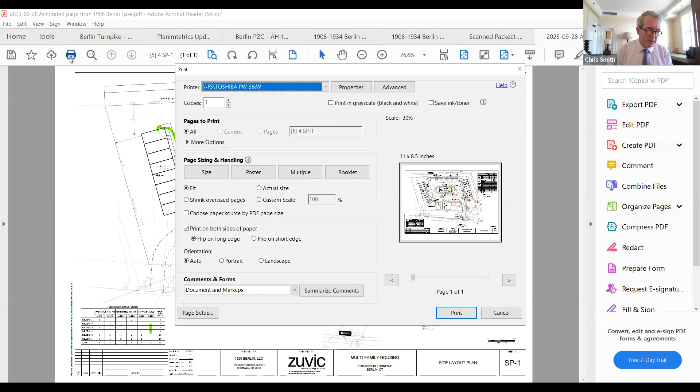I think Chris had some other questions he wanted me to address as well. For the record, Chris Smith. Mr. Ville, in your opinion, is the separation distance between the parking area and the buildings adequate and does not create a safety issue?

That's correct. And relative to the lighting, is it your opinion that the lighting as designed is adequate and sufficient for the proposed residential community? Yes, it is.

And with your driveway design and internal parking and driveway design for this site, in your opinion, is it safe and adequate for pedestrian and vehicular traffic associated with the residential development?

Yes, it is. And is it your opinion that the slopes and the retaining wall, in particular, can be constructed as designed in your plans? Yes, it can.

As to the compaction and other issues that Mr. Hanfield indicated, that there could be conditions relative to a qualified professional engineer or geotechnical engineer being retained to review the final plans, is that something you think is typical and not a problem?

I would take no exception to Mr. Hanfield's suggestions regarding compaction and geotechnical requirements based on his letter dated October 4th.

And again, the preliminary comments received from the state DOT STC relative to the request for their preliminary comments concerning what will hopefully at some point be an application for an encroachment permit. Is it your opinion that those items listed in the DOT STC response are minor and can be addressed readily when the application for the encroachment permit is submitted to the state, post receiving any and all required municipal approvals?

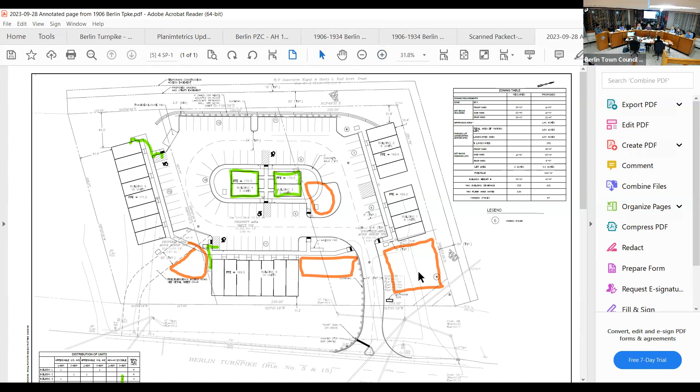So you can see the four areas in red that we've highlighted there. The central one, next to the building in the front, to the right - that one's actually in a depression. The one at the north side of the property is relatively flat, not a steep slope. And the ones internal to the site, on the island and adjacent to the emergency access way - not over the emergency access route - those are relatively flat as well.

When I look at the plan, it's hard for me to envision when you're looking at a flat piece of paper. But that westernmost stretch of parking, it's going to be hard to maneuver all the snow from that back section all the way to the front of the property.

So is that what the plan is, to maneuver all of that, push it around to the front on both sides? Or is there going to be removal? Is there a plan to be removing it?

What's the plan? Typically in sites like this, we'd use loaders, not just plows. So there is some picking it up and moving it type of action that takes place. It's not just plowing. So what are the circumstances that would require it—how much snow would have to fall to require that the snow be removed from the site versus deposited on the site?

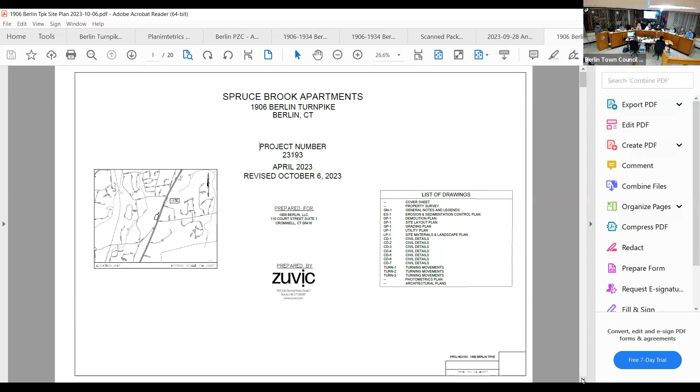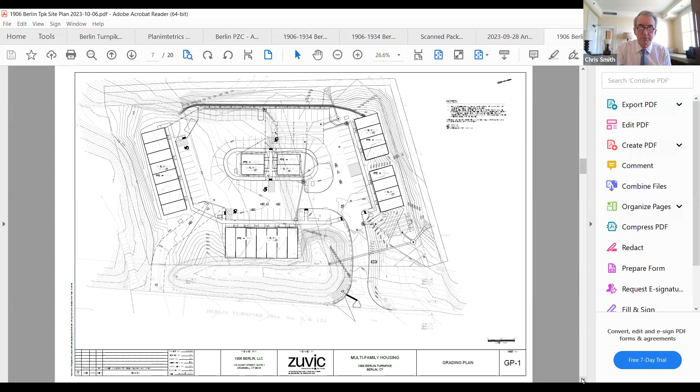If I may—Chris Smith, for the record, just wanted to indicate that the maintenance plan that would be prepared relative to slopes and the retaining wall would likely be generated with the consultant Mr. Hanfield indicated could be retained, as a condition of approval, for the purpose of overseeing that when the construction of the retaining wall occurs, or when the permit—that would have to be prepared before the building permit is secured. So I just wanted to clarify that. Thank you.

Mr. Dyken, did you have a follow-up question? I'm sure you can't come up with an answer with scientific precision for Commissioner Dorsey, but could the property handle, let's say, a foot of snow overnight? Is there enough space to pile up snow of that magnitude? In my opinion, yes.

For the record, I brought up the grading plan. Other questions?

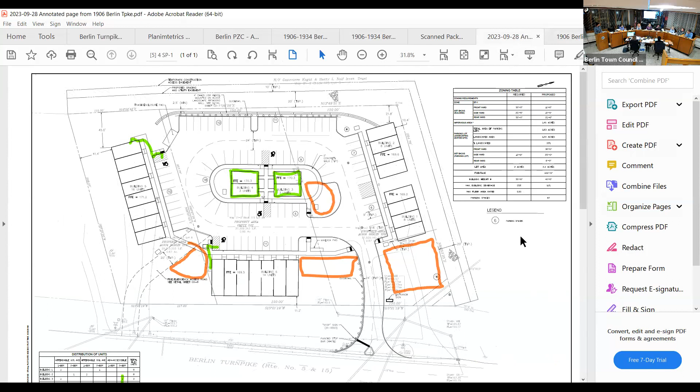Just more of a comment—looking at the snow storage spot that's in the depression to the northeast, I see you have mailboxes in the way, as well as plantings, and then a guardrail as well. It doesn't really seem accessible to snow removal equipment.

And then the other comment I'd like to make—we touched on it last meeting—I'm not seeing any additional dumpster space, just guessing based off the square footage there. That's very insufficient for 52 units. It almost seems like it would be appropriate for each building block to have their own dumpster, especially considering that people all the way to the north are going to have to carry their garbage across the entire site to dump it.

I can see this becoming very messy very quick. The other thing I noticed is that there are no garages here, are there? Correct. All right, so everybody's parking outside—all those parking spaces around that circle, everything is basically pavement. So if you're going to get a foot of snow, where are the cars going to go so you can plow? Or are you going to plow them in, and then they have to shovel themselves out and back out, and then the plow has to go? I'm not sure how that works.

For the record, Attorney Megan Hope with Alter and Pearson.

Just a quick comment regarding snow storage. What's typical in complexes like this is there's a snow plan in your lease agreement. You provide your cell phone number to the operator of the complex, and after a snowstorm they send out a mass text saying the day after the snow stops, at a certain time you need to move your cars because they're coming in to plow. Typically, and this has been my personal experience living in an apartment, everybody leaves, they clear the site with plows and other loader equipment.

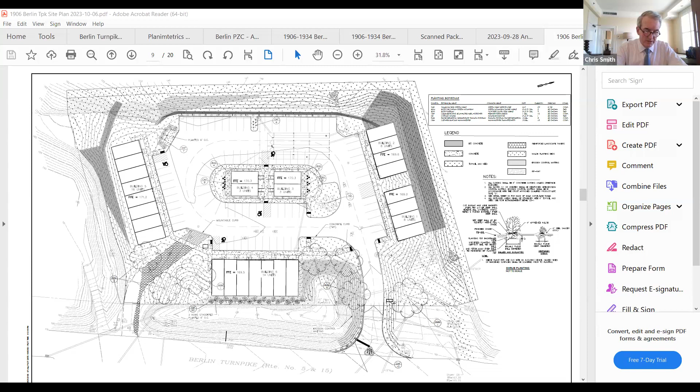There's a reference to basement windows, complete code, as the drawings are only conceptual. As we indicated with the correspondence from the assistant building inspector, looks like most of these items will be addressed, just scrolling through them, with the final detailed construction plans that will be submitted to the town in support of obtaining a building permit. That would be reviewed, I presume, as they usually are, by the building, not only your building inspector, but by your fire marshal, to ensure that the final construction plans addressing these concerns that he makes reference to here are addressed. But that would be my response at this point.

And he does note that there's no code requirement for the minimum distance to a slope. But he would certainly - most of the items I'm looking through here appear to be items, as with the building inspector, that would be addressed with the final detailed drawings for the buildings themselves when they're submitted post zoning approval.

This is the letter I was speaking of from Steve. If you're asking me to comment on what's highlighted, then the final plans would be adjusted or would address that. I can't see everything because of the block out on the right-hand side there, with who's on the Zoom.

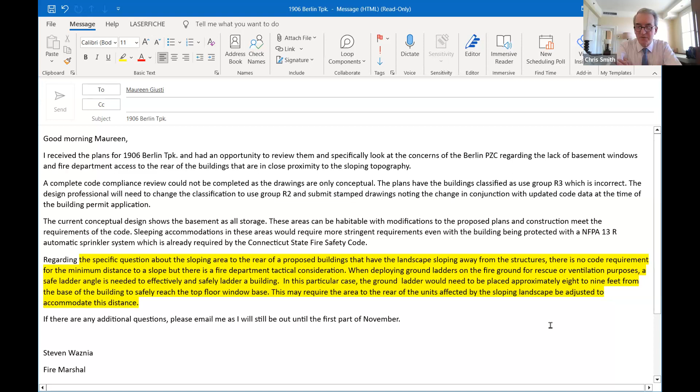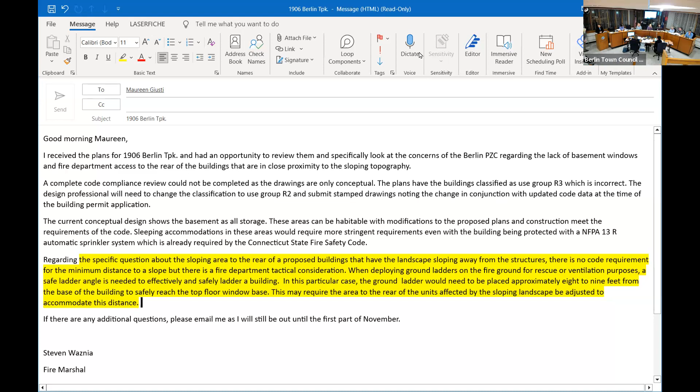Enjoy your flight home. All right, Dan, maybe you could talk to the commission about how you could design the site plan differently to address that comment from a minute ago, by either grading it differently or using a retaining wall or any other method.

Dan, for the record, you're correct. If we were to expand the level shelf behind the building, then the slopes would either get steeper, or a larger easement would be required to expand the limits of the slope, to run the slope out equally far. So if we're extending the shelf 4 or 5 feet, the slope runs out 4 or 5 feet to maintain the 3 to 1 slope.

Steeper slopes are plantable and can be maintained, steeper than 3 to 1. We can go to 2 to 1 and install erosion control matting. If the slope gets steep in a way that's not maintainable, then you could conceivably put a retaining wall there.

How high would that retaining wall be? We're already at 18 feet, is that right? The retaining wall, I think we're talking about the north side now, because if we're talking about access to the buildings, I think we're talking about the slope on the north side of the plan, at the rear of Buildings 1 and 2. So there's no retaining wall there at present.

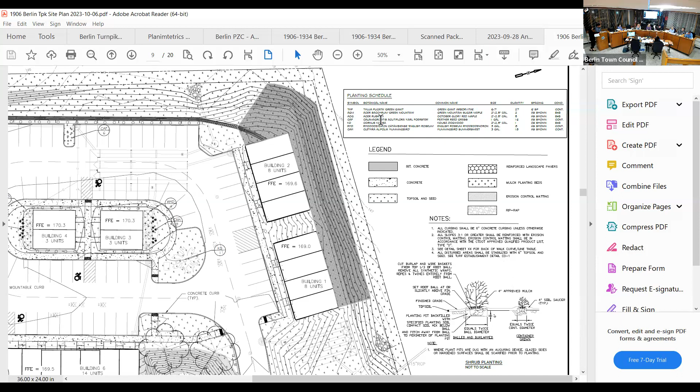Do those detention measures intercept what's coming off the turnpike? Are they connected to it? No, the runoff from the turnpike is not impacted by our project, so we do not capture it. There's a DOT pipe under the proposed driveway that would remain and continue to carry that stormwater.

I'm not suggesting you'd have anything to do with the water coming from the turnpike, except that the water coming from the turnpike has the potential to impact that northern tributary area. Is that correct? Yeah, the outlet for the DOT drainage is much lower than our project. So it's a few feet lower than the existing property, and it'll be quite a few feet lower than our project when the fill is imported.

Can I ask a question? Let me ask a question.

The area in the front along the turnpike, I guess you'd call it the swale, because there's a 10-foot difference there from your entrance way down into where you're proposing to store snow or your excess stuff there.

How far is that from the turnpike, right up against it, correct? That's basically it. Well, the swale is located all in the DOT right of way, and I'm not proposing any grading change to the sides of the swale.

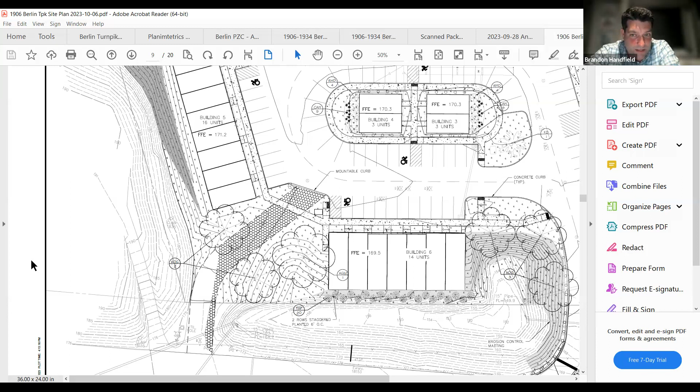Does Mr. Ville want to address that question, or? No, this is a new request by the commission that we have not had time to prepare for. I'm sorry, we've had four meetings so far, and this is the first time I'm hearing about the shelf that we've prescribed being inadequate. So I can't respond to that one at this time. Okay, so that's a question mark. All righty.

I guess my question is, why would this shelf be any different when it comes to considering our comments?

What? I'm sorry, I didn't hear you, Mr. Ville. He was talking to me. Again, for the record, Megan Hope, with Alter and Pearson.

So, obviously, if we had gotten that comment earlier, we could have come better prepared with some options. I think if it's going to be a requirement of this commission as a condition of approval that we need to have an 8 to 9 foot shelf around all the buildings so that a ladder from the fire department could get there.

That's fine. We would need to show how we can accommodate it. And at this point, Dan can't answer that because we would need to look at options. And I think, could we approach the DOT with an encroachment permit where we could regrade a portion of that area? That's possible. Could we shorten the building by whatever amount of feet we need to have that area? That could be an option. It's speculative at this point.

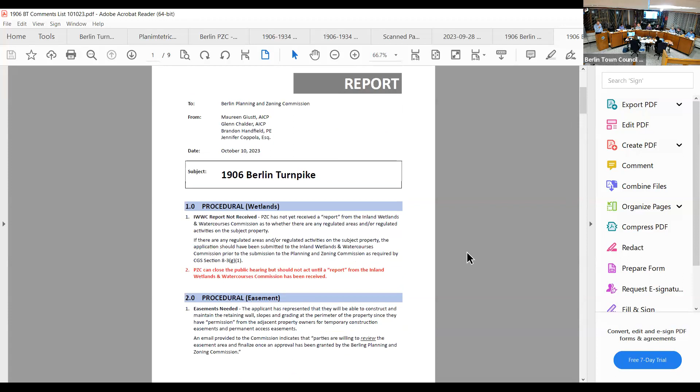The third element relates to the site plans themselves. I think Attorney Smith indicated earlier that they really had no objection to the comments included in Brandon's report. I think the concept of the quality of the fill being used, structural fill, is identified in this report - page 3, item 2A talks about controlled structural fill or compacted granular fill.

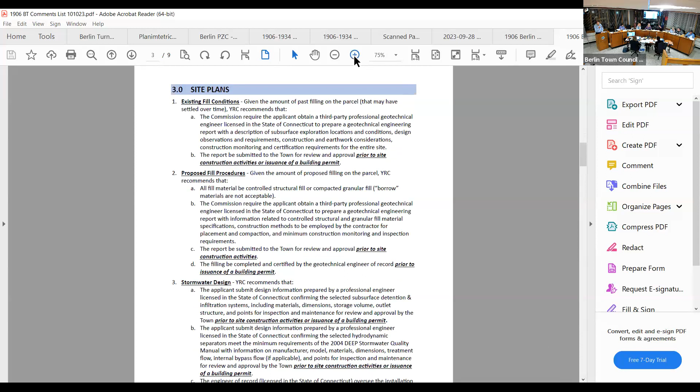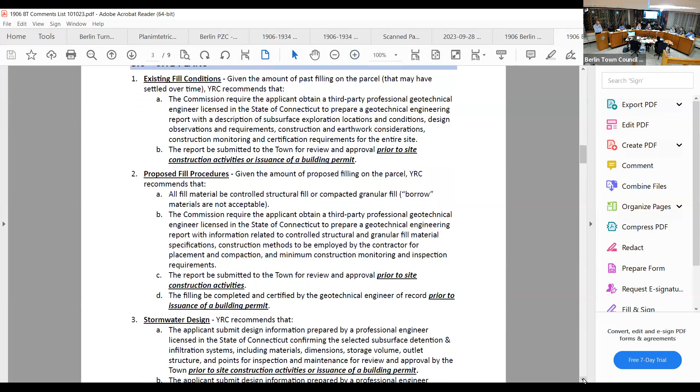I think with regard to the issue about snow removal, etc., the commission could apply a condition of approval related to keeping the travelway open for fire response, using a loader as necessary to clear the snow. As you know, there are times in large apartment complexes where snow gets ahead of their ability to keep up, and as long as we make sure public safety is protected, there might be a way forward there.

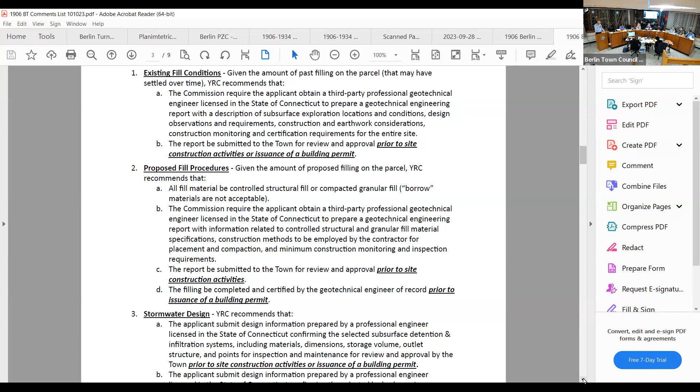Listening to the discussion tonight about the trash provisions, I noticed there's no enclosure around that trash area. So one of the things the commission may want to think about for a condition of approval is an enclosure with a gate, so if anything does spill over in terms of trash or whatever, it's going to stay in the enclosed area.

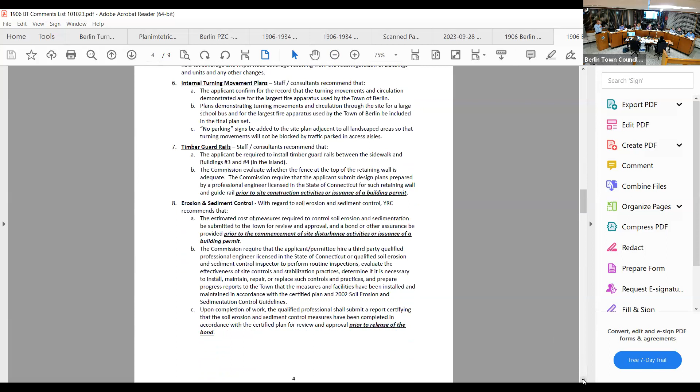Item number 4 is the architectural plans. I don't think this has been disclosed to the commission, but just to make it clear for you, 2 buildings in the middle, when the application came in, were 4-unit buildings.

Okay, can you bring the site plan up for a sec? Well, I wish I had a green. No, I was just kidding, actually.

So the 2 buildings in the middle, there, right where the mouse is going, when the application came in were 4-unit buildings. They were similar to the other buildings in the complex with 1-bedroom units on the ground level and 2-bedroom units on the second and third. You may recall we commented that we need handicapped units here, and so as a result those buildings have changed to 3-unit buildings, a handicapped unit, double width on the first floor, and then 2-bedroom units on the second and third floor.

The unit count has stayed at 52 units because building 5, you can scroll over to the, yeah, keep going, there you go. A little more if you could.

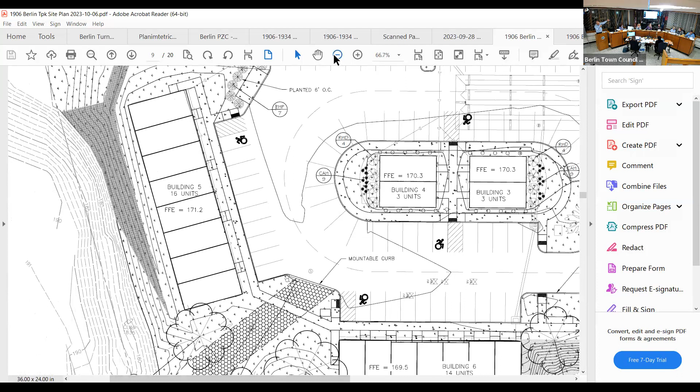A unit has been added to the west end of that building behind, or near the trash enclosure. That's a new module. That building, when the application came in, was 7 modules, meaning it had 14 units. Now there's 8 modules and 16 units.

And as a result of that, I find it hard to believe that there's been a reduction in impervious coverage, but we can check that as part of the commission's deliberations. But the more important thing I wanted to bring to your attention is the unit mix has changed. So there needs to be a reevaluation of units, how many units we need to meet the affordability set aside percentage in terms of how many 2-bedrooms and how many 1-bedrooms. I think that's something we're going to have to take a look at as part of the deliberations.

I do think there's an issue with regard to the basements. Again, the building official has identified that the space doesn't meet the building code definition of habitable space. Habitable is a special word in the building code; it means that it's used for living, sleeping, cooking, and other things, but it's potentially usable space. And so it's just difficult to wrap my head around in terms of what this means for the complex.

If the commission is concerned about the potential use of the basement, your options are to require a slab on grade for those buildings, or reduce the clear height in the basement to, I think it's 6'4" in the building code, then it can't be used for habitable space at all. It's still there, but you can't use it. So particularly for the affordable units, we created a 1-bedroom affordable unit with a full basement. Does that actually create challenges in terms of the affordability of the unit? It's not clear how that gets managed, but I think all of this stems from the fact that...

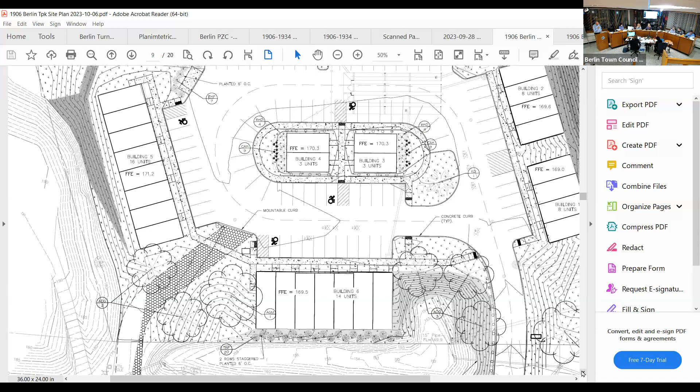On page 7 of the report is section 5, dealing with traffic and transportation. The applicants have started their dialogue with DOT in terms of their encroachment and curb cut permit. I think as long as town staff is kept in the loop on this, in terms of those requirements, making sure that the concerns expressed here about traffic volumes, U-turns at Spruce Brook, and all the other stuff are considered. It's a state roadway.

Section 6 deals with the zoning regulation that was submitted. You may recall as part of the testimony, Attorney Smith indicated that the submission of a regulation was required by the statute, but the commission didn't have to approve a regulation. So the commission, as part of deliberations, will have to decide how it would like to approach this. I think there's a couple of different options that have been shared with the commission for your consideration.

Section 7 of the report deals with the affordability plan. Again, because of the change in the unit mix, this ripples throughout the affordability plan in a lot of different ways in terms of the number and type of units that need to be deed restricted. No finish schedules have been provided at this time to demonstrate the units are identical. We've had conversations about the affordability term, acceptance of the administrator, income eligibility, and some other provisions in the affordability plan. But I also think it's possible that these could be addressed, depending on the commission's considerations, through conditions of approval. So that's all I have for you. Our hope was that this document would simplify things for the commission moving forward.

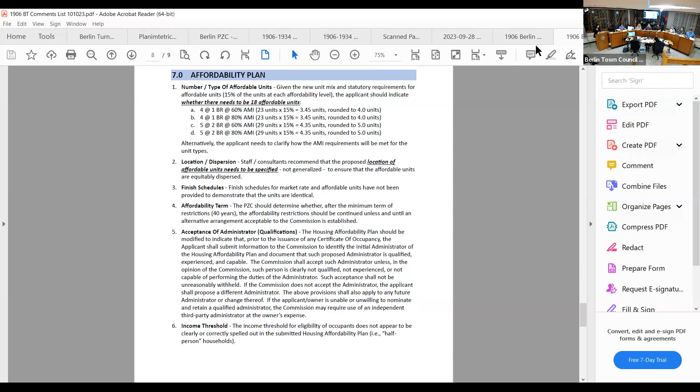I do want to point out for the record that there are a number of items in the report that have already been addressed in this final plan set. One in particular is the designation of those specific units. If you turn to sheet SP1 of the plan set, you're going to see a chart on the right side of your plans.

That chart, at the top, is called distribution of units. You're going to see the units broken down by building, with columns for 1 bedroom and 2 bedroom at 60% AMI and 80% AMI, showing that even distribution. Just below the zoning table, I wanted to point out that we have designated those specific units.

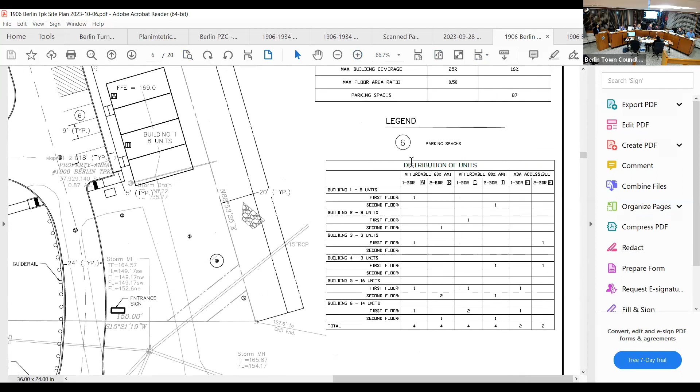Okay, I'm sorry, because we just found the page that we were supposed to be looking at. Can I ask you to repeat which designated units they are?

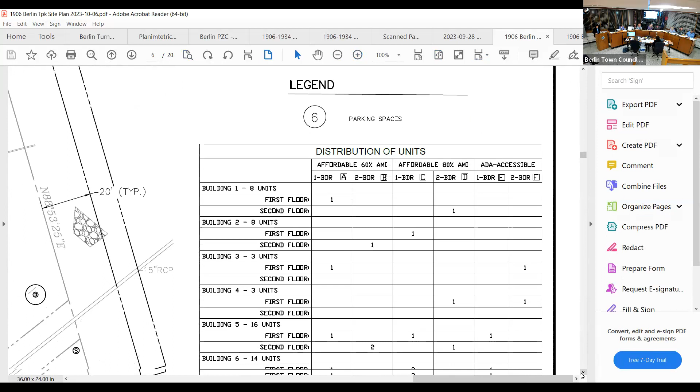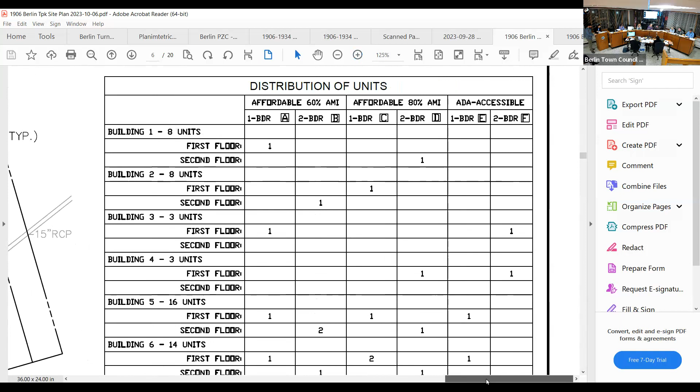Sure. So if you look at the distribution of units chart, it says distribution of units, and below it you're seeing the different columns. Then you see where it says 1 bedroom with a letter A, 2 bedroom B, B, C, D, E, F. Then if you look at the buildings, you're going to see those same letters over a specific unit, and that's how you can tell where the specific unit is within each building.

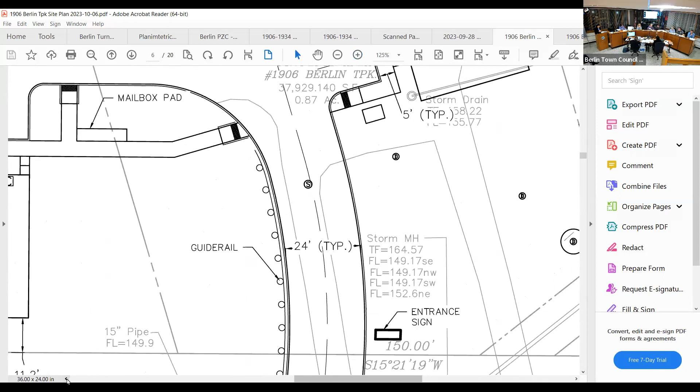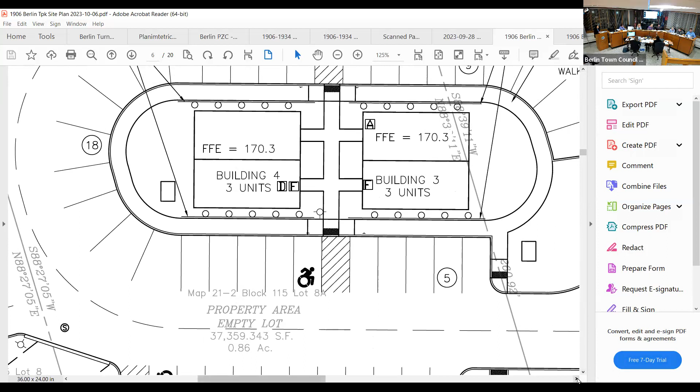For example, if you look at building 2, you're going to see a letter C and a letter B over the units. That would be a 2 bedroom at 60% AMI and a 1 bedroom at 80% AMI, for example. We've shown the chart on the right to show that even distribution, and then used those letters to show which particular unit is located within the building.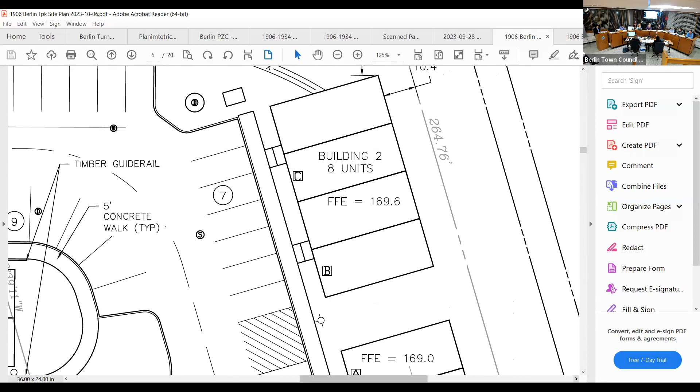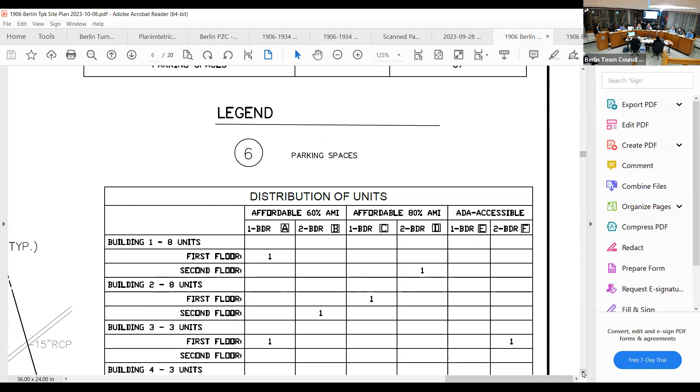Before I turn it over to Brian, what Chris told me is that we will not consent to go beyond that 40-year requirement, which is within the statute. We will not go beyond the 40-year requirement. He told me he already said that, but if he didn't, I'm saying it now on the record. We will stick to that provision, and also the applicant and the client will be the administrator of the affordability plan as well. That was something he told me he had already indicated, but I'm happy to repeat it for the record.

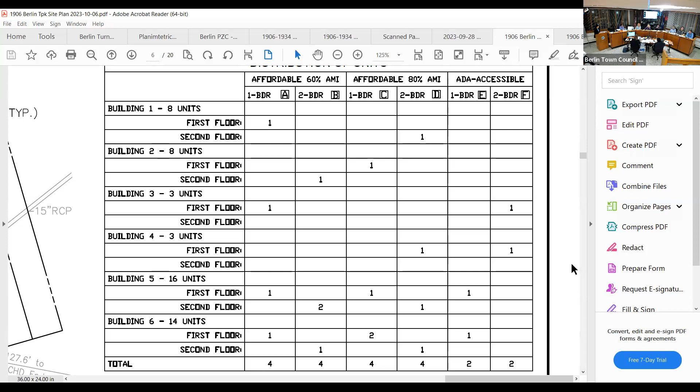I think with that, Brian, do you think you could go through section 7 of the staff report and touch on the items that you feel still need to be addressed? Sure. For the record, Brian Miller, the Miller Planning Group of Wallingford, Connecticut.

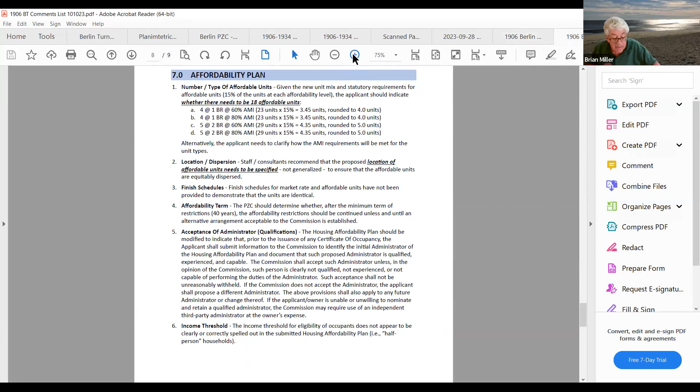I took a look at that. We received it late Tuesday evening, and yesterday I was otherwise occupied, but I did go through it. To go down the list in the affordability plan, as Glenn acknowledged, we submitted an affordability plan dated August 2nd, which I think addressed a lot of the issues he raised. But on these particular issues, number one, the change in the type of affordable units, we'd be happy to make that change. That's not a problem.

Sometimes the site plan got ahead of the affordability plan. The location was just addressed. As for the finish schedules, I'm not sure if the developer has furnished that, but I do want to point out that the plan did say that it would be identical.

The affordable units would be identical to the market rate units. The original proposal to have the floating affordable units sort of ensured that, since the affordable units weren't established at the point of construction. So all units would have been constructed equally. I mean, I don't know what the schedules mean exactly. I'll leave that to the contractors.

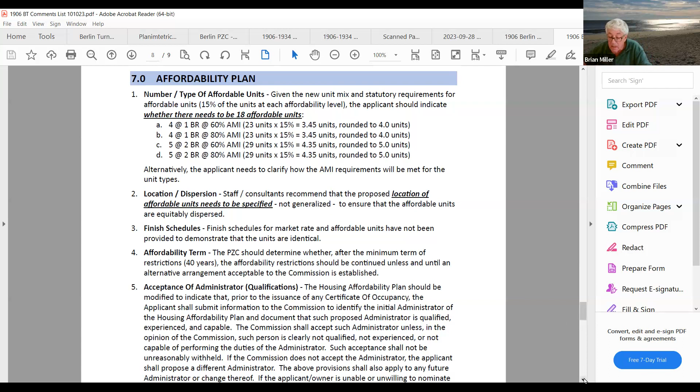The issue of evading these regulations was discussed, and I think the state, we're going along with this 8-30g. It's a state regulation, and we've been interpreting it as it's been over the past 30 some odd years. But the way it's put together is that it expresses: if it meets these qualifications, including the 40-year term, it qualifies as an 8-30g. It doesn't say that it would need to meet any additional qualifications or requirements.

I think that speaks to the 40-year affordability term, but I think it also talks to this acceptance of administration. We've not changed that. And again, I would ask, I believe this isn't the first 8-30g that's been before this commission, and these are very general requirements. Why they pop up all of a sudden, I guess, would be one question.

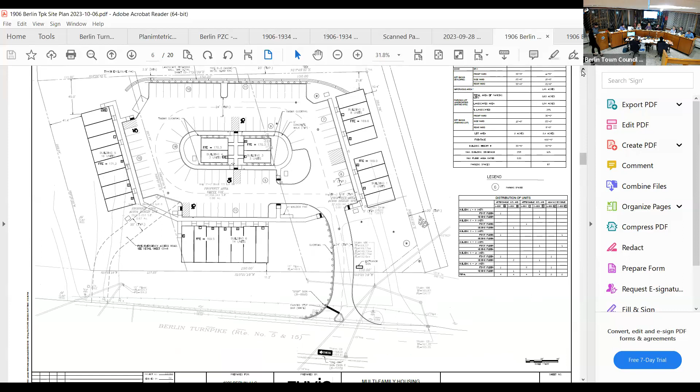So the building at the west end of the site, in a previous revision, was the same footprint as the building on the south side of the site. The building has gotten longer and has more units, but it shrunk in its depth. Building 5 used to look like building 6, which is at the bottom of the screen - you can see it was much deeper. So it's gotten shorter and wider, and the total reduction in the footprint of that building is 470 square feet, accounting for the extension of the sidewalk, giving a total reduction of approximately 220 square feet of impervious area. So while we went larger in one dimension, we went smaller in the other.

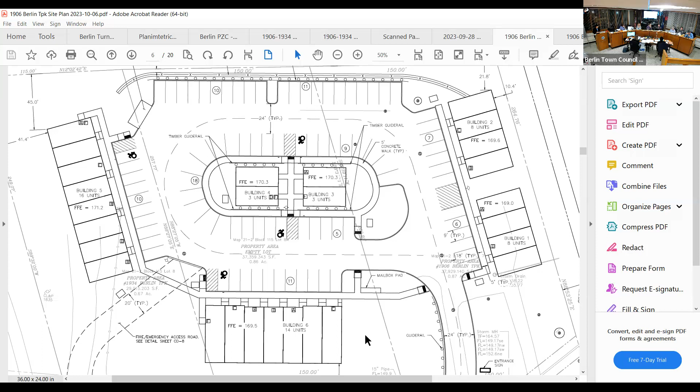Regarding item 6, which had to do with internal turning movements, we did submit as part of this revised plan set that these internal turn movements worked. I would direct you to sheet Turn 2 and Turn 3, showing that the town's largest fire truck can fit through the site. Sheet Turn 1 is the plan that demonstrates that the school bus can fit through the site. So those are things included in this plan set.

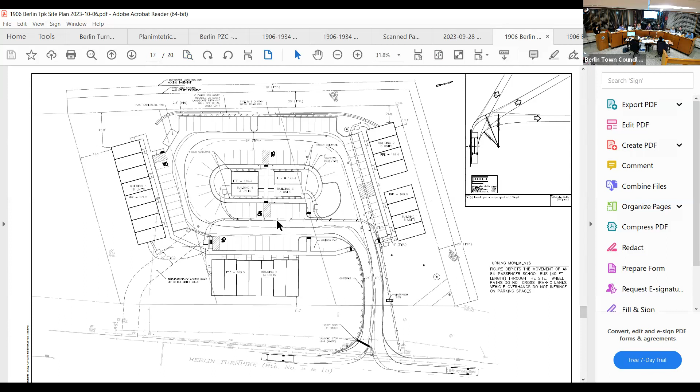We don't have an issue with 6C about the no parking signs, so that's fine as a condition of approval. Regarding the timber guardrails, that is item 7 - those were added to the plan. You can see those on the west and east sides of the central buildings on sheet SP1.

Dan, regarding the fence on the retaining wall, can you state for the record how tall that is? I'd have to refer to the civil - 4 feet, it's shown as 4. So we are showing a 4-foot fence on top of that retaining wall, on the west side.

That's item 7B, car protection. So in front of the wall, we have a metal guide rail, and on top of it we have a fence. The fence, you can see it on SP1, it has a note. It doesn't have - I was looking for the detail you're referring to. I thought he just said the sheet number and I was trying to find it.

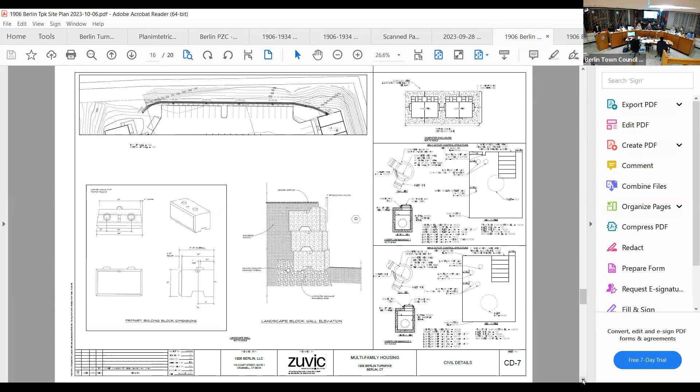I think everything in items 8, 9, and 10 were all things from Brandon's memo that we already agreed could be conditions of approval. So now we're at the architectural portion of Glenn's report.

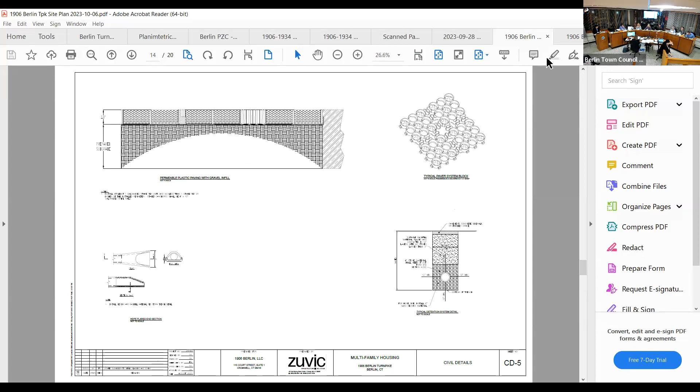I did want to reiterate for the record that yes, there has been a change in the unit mix since the beginning. I believe when Attorney Smith originally filed, it was 26 one-bedrooms, 26 two-bedrooms. We now are at 23 one-bedrooms, 29 two-bedrooms. The total number of units, 52, has remained the same, and the total number of parking spaces, which is 87, has remained the same as well.

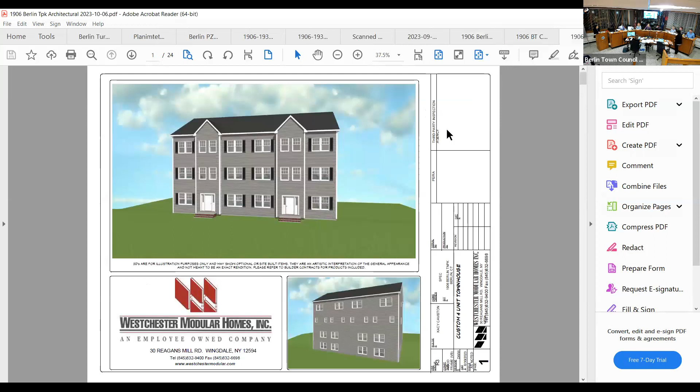Regarding the basement configuration, we would agree to a condition of approval that they not be used for sleeping purposes. We did see the comments that the building official made and don't disagree with his comments related to the code and how that space could be used. My understanding is that the concern is those could potentially be used for additional sleeping purposes, and we would be fine with a condition that says that use is not permitted in those basement areas.

May I interrupt quickly - does that mean you're agreeing to a maximum ceiling height of 6'8"? No, the client's indicating we wouldn't consent to changing the ceiling height in the basement. So how are you going to prevent somebody from sleeping down there or subletting that space? Sure, so we would have terms within the lease agreement, which is standard, that there can't be sleeping in the basement. But because there's no way to get people out of that basement, is there? There's no windows. There are windows in the basement.

In the rear elevations. All right, let me look at these elevations, okay?

All right, here's the rear elevation. So are these not the first floor? The first floor is, no, that's the basement, and the key part here is to look at that green, to the right and left of the building. So that would be all green, right? So there's nothing to prevent people from having that as a living space.

Really, why don't you come right down to it? You've now got windows out there in the basement. Well, we do think residents would be using it, but they wouldn't be sleeping down there. I mean, in my basement, I have like an art table for my kids and storage, and I think that's what we envision that use being, like typical basement uses, accessory uses, ancillary uses.

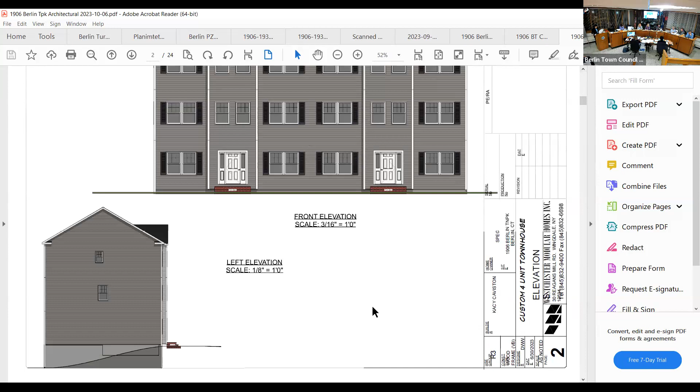Now this, sort of the front door on page 2, your front elevations as far as your front doors go. Do these buildings step out at all, or is it just an optical illusion that you create with the framing on the door? So they do, hold on a second. I think the best thing to look is at the floor plan. Ooh, that's right, it's right below it. Does step out a little bit, the face of the building.

All right, questions? Sorry, I didn't mean to hog that. We're going, I'm on page 3. Building, each building has like 1, 2, 3. Page 3, sorry.

Just for clarification, the windows on the bottom are your basement windows. Correct. So where's your rear egress going to be, those second floor windows? I'm confused by the question. So there's no back door in this building. Correct. If you ever had a fire, how are you getting out? You're going to jump out a window? There's no doors in the back of that building. Correct. So our buildings do meet the fire code.

Was there a report that our fire marshal passed that? I don't believe there's a review of the fire code from the fire marshal yet. That typically happens at the time of building permits. Post approval, we file complete detailed plans, reviewed by the building department for compliance with building code and the fire marshal for compliance with fire code. But they have been designed in accordance with both the state building and fire code.

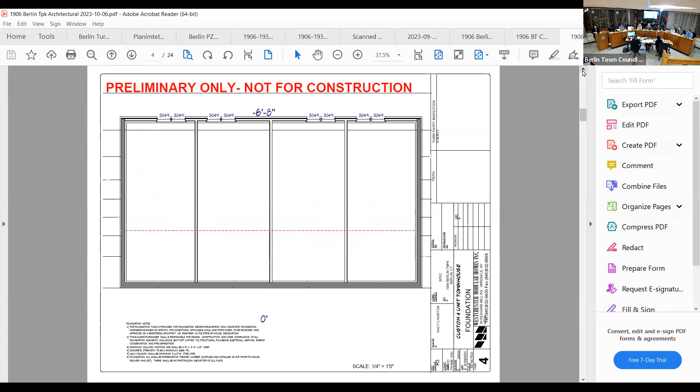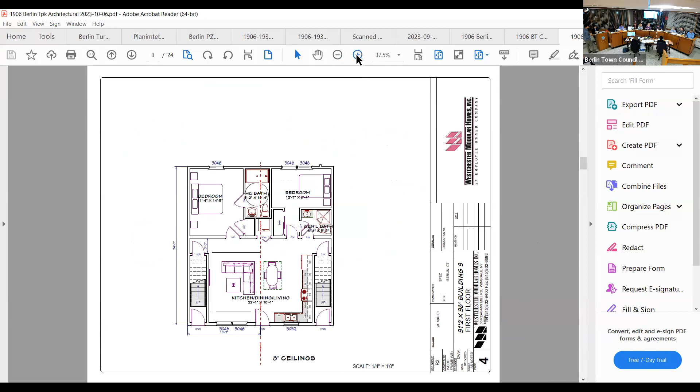This is supposed to be the basement, right? This is the foundation. Okay. Dan, is that one correct? Is that the one you're looking for? That's the 2-bedroom accessible, that's buildings 3 and 4. That's three. Page - with the plan that says page 4. No, building 3, page 4.

Oh, I'm sorry, on this, to the thing, can't seem to get rid of it. My page 4 does not look like that. I don't know, yeah, probably. Each building, if you look, on the right-hand side of your page it says what building number it is. First floor, building 3. Building 3, okay, building 3.

31'2" by 30 foot, building 3, first floor. So it says building 3, it should be the 8th page in the plan set. How does that help, 8th page in your... Well, if you count the pages, it's on the top of my screen, it says page 8 of 24. Page 4.

Ah yeah, okay, so what are we looking at now? We're supposed to be looking at the handicap units. Yeah, I'm just taking a review. What's that marriage wall that I see? What's that stand for? There's not a wall that cuts directly through the apartment, there's a perforated marriage wall. Oh, it's a modular building.

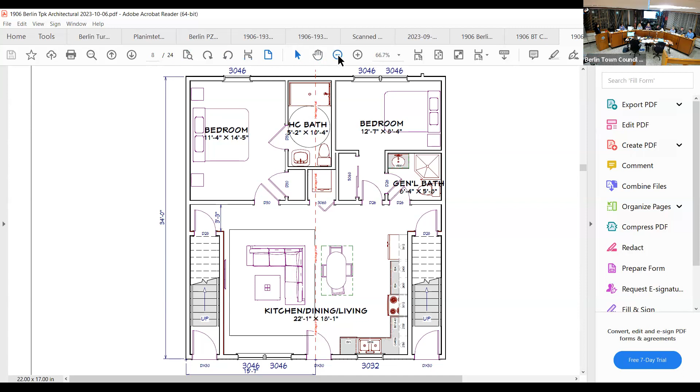Okay, because on the pictures, on some they say 9 foot ceilings, and then others say 8 foot ceilings. I don't know if that's an upstairs or downstairs or what.

Just to address the commission, I think Attorney Smith had mentioned this in the beginning. These are conceptual plans. Every building code, once we apply for building permits, this gives us the idea of the perimeter of approximately what's gonna happen inside.

Some of these questions are detailed questions that, I don't mean to be rude, but really kind of don't meet your purview here. Yes, I want the buildings to look good, but it's your opinion perhaps that there should be shutters in the back. It's my opinion that there shouldn't be. It's just two people having an opinion.

But what's a matter of code is that we will definitely meet those. These are preliminary conceptual plans that do not meet every building code. If the fire marshal says we need to add an additional type of sprinkler, we'll add it. If for some reason this can't work and we don't get a building permit, we couldn't proceed.

So I understand the details and what you're looking for, but some of the stuff is items that will come up later.

Well, I understand where you're coming from, Mr. Snow. However, you have to understand, with the commission we're in a public hearing right now, so we have the opportunity to take testimony from you folks. Once we close the public hearing, then I can't go to you, I can't discuss things.

Understood, so I am putting everything up front. This commission is doing everything it can at this late hour to put everything up front, because you're already telling us you're not going to extend beyond today, which tells me I've got to have a motion to close the public hearing.

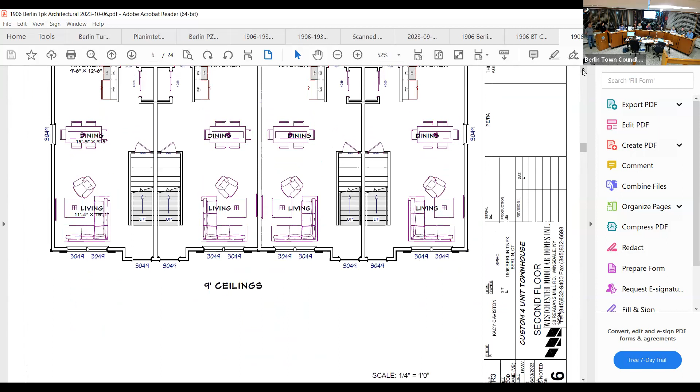Because we've got the backs of the buildings that are very tall from the neighbors, and if they're 9-foot ceilings on some buildings or 8-foot ceilings on other buildings, they're gonna see the differences, and it's hard for us to see that on a flat drawing. So now we're having these nice little picture drawings, and I'm not technical so I can't tell you what that is -- I'm trying to get a better visual of what they're gonna see on the back or in the community.

And it kind of leads into another question I have -- your plans have changed. I think the planner had mentioned that the buildings have gone to 8 instead of 7, and maybe the length is shorter or longer. I think what we were looking for before is this letter that had to do with the handicapped units.

I'm having trouble understanding how this plan fits into a narrower or longer building, because we have wheelchair accessible units in buildings 5, 6, 3 and 4. I know it's just a general picture, there aren't lengths, but does that accommodate them the same in all of those buildings if some ceilings are 9 feet and some are 8, and some buildings are longer or narrower? There's no elevator. We've got 9 feet for the first floor and 8 and 8 for the second and third.

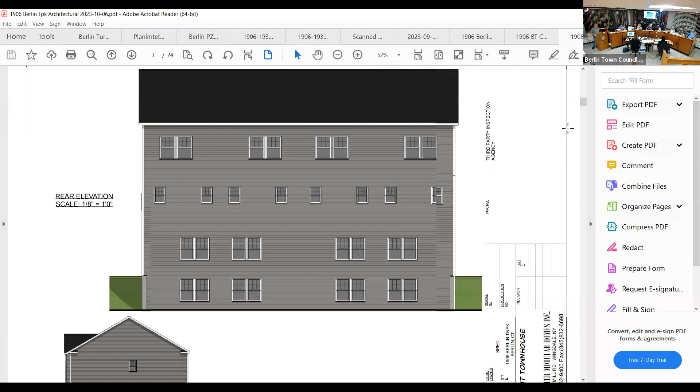Regarding the handicap accessible units, my understanding is that the ADA units are those units in building 3 and building 4, and that those aren't floating units. That floor plan is for the middle units, the ones in building 3 and building 4. So there's a different floor plan for the wheelchair units in 5 and 6. A good indication is if you look through the floor plans, when you see the bathroom you'll see the HC designation, so you'll know you're looking at that accessible unit.

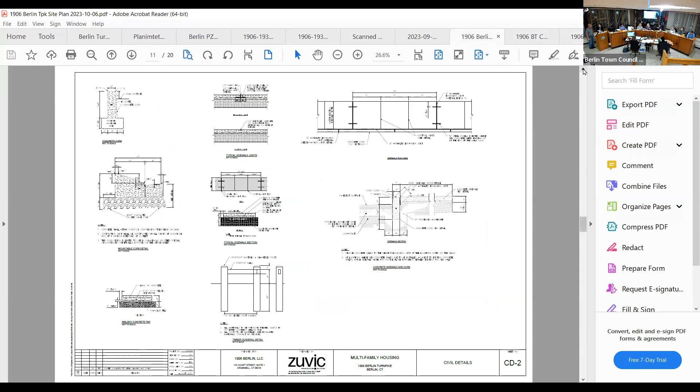One more thing, two more questions. On the drawing on SP1, it appears there are stairways into all of these buildings to get into the front door, is that right? It just looks like stairways have been suggested on the drawing. Most of them are one step or flat. In the case of the accessible units, you'll see the sidewalk runs around the side of the units. So in buildings 5 and 6 you've got an accessible unit at the end with a longer sidewalk, so there's obviously no step there. All the accessible units have no step, and the remainder have one or no step.

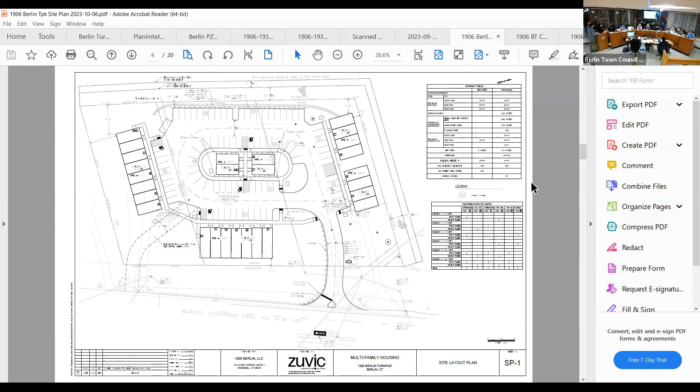So the wheelchair user has to go to the side of the building to get in, maybe because of a graduated sidewalk. And the ones on buildings 3 and 4, that's a flat level entry. That's fine. You've got wheelchair parking on opposite ends of 3 and 4, so one has to travel further. Okay, thank you.

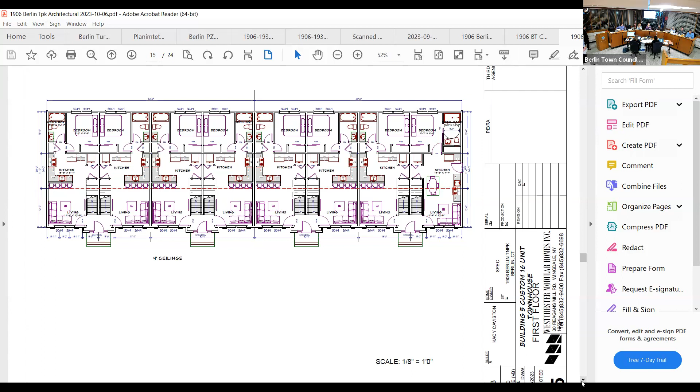Okay, thank you for noting that. Anyone else, really quick? Members, yes. Anyone from the public who wishes to address the commission, now would be the time to do so. I'm not seeing anyone online or from the public.

I will make a motion to close the public hearing. Motion to close by Ms. Jorsey. Do we have a second? Second by Mr. Hamel. Further discussion on this? All those in favor, aye. Those opposed? So moved. Okay, thank you. All right, that one's closed.

Application of Little House Living LLC, prepared by Christopher J. Smith, Esquire, Alter and Pearson LLC, submitted pursuant to Connecticut General Statutes 8-30G Affordable Housing Land Use Appeals. Application for site plan approval of a 20-unit multifamily residential community on real property known as 1676 Berlin Turnpike, map 22-1, block 114, lot 10.

And this one is still open as well, correct? Yeah.

All right, hi again. Good evening, for the record my name is Megan Hope. I'm an attorney with Alter and Pearson in Glastonbury. I'm here tonight representing the applicant for the referenced application that was just read, for the continued public hearing located at 1676 and 1688 Berlin Turnpike. Again, I'm filling in for attorney Chris Smith tonight, so there are a couple of items he wanted me to touch on.

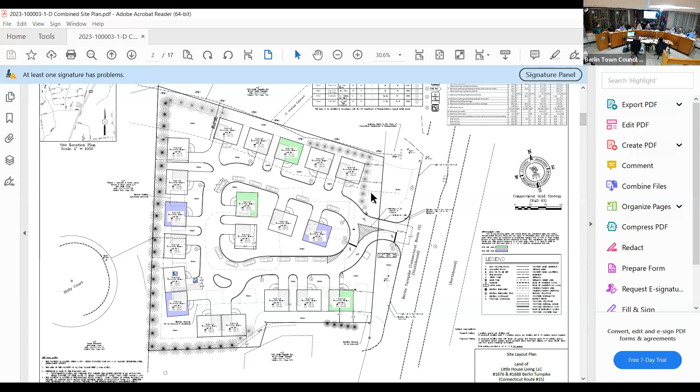Next, there were expressed concerns regarding several issues, number 2A, the amount of impervious coverage and the lack of green space. To confirm what was said last time, I believe I misspoke on the exact percentage, but the total impervious surface is 48% plus or minus, meaning 48% of buildings, sidewalks, and roads is impervious, and the remaining 52% of the site is green space. The site is within the BT1 zone, which has a maximum building impervious coverage of 80%, so we are significantly less than that maximum allowed in the zone.

In addition, going through the town's regulations proposed for the infill district, the most recent revision I was able to find published was a 50% maximum, and we are below that maximum as well in terms of what we are providing for impervious surface. So we meet both the proposed requirements and the existing requirements for the zone.

Can I ask a question about that? You said impervious surface is an estimated 48%, which is building and roads or whatever. Correct, building, roads, sidewalk, yes. Is that assuming you have 100% use of the acreage? That is how an impervious surface would be calculated.

Is that also including your drainage or filtration systems, or is that considered green space? They would be considered green space. They are below grade, so it's lawn on top of them. But you can't put a barbecue pit there? You absolutely could, on top of the impervious surface there. It's not, I mean, impervious surface, it's green drainage space.